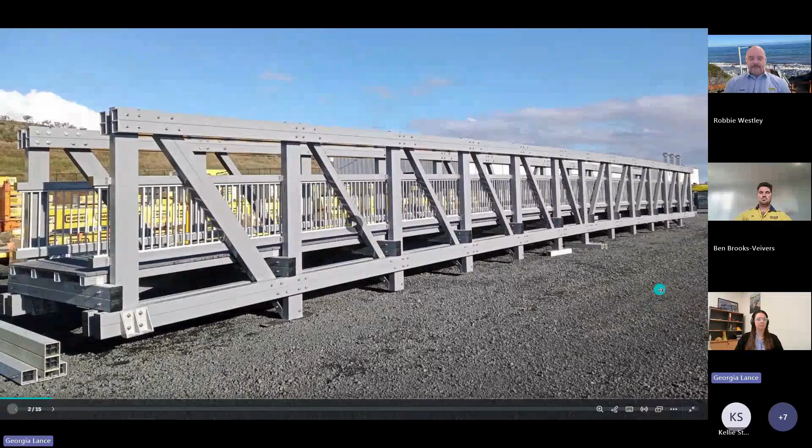Today, we are going to discover how Wagners CFT is designing infrastructure for faster and cheaper construction phases, and how to translate those designs into a better bottom line for your business.

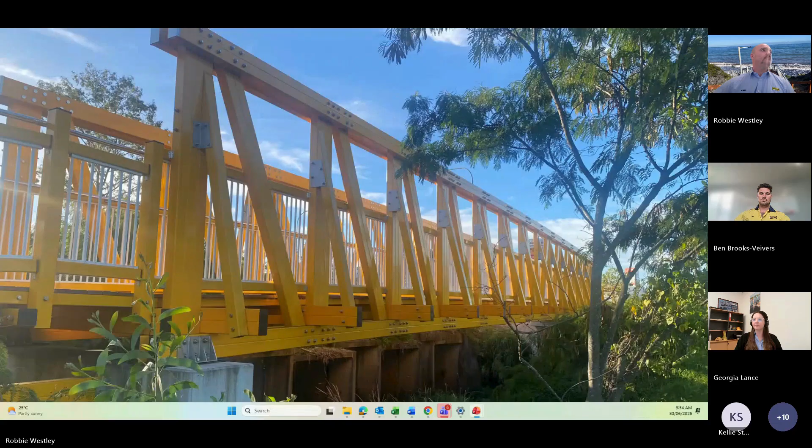Thanks, Georgia, for that. Welcome to the Right Connection Part 2 webinar. Over the past 30 years, Wagners have delivered over 2,000 structures for various applications ranging from boardwalks, bridges, jetties, wharfs, staircases, and many other applications. Over that time, our designs and methods have evolved to increase efficiency in both design and installation.

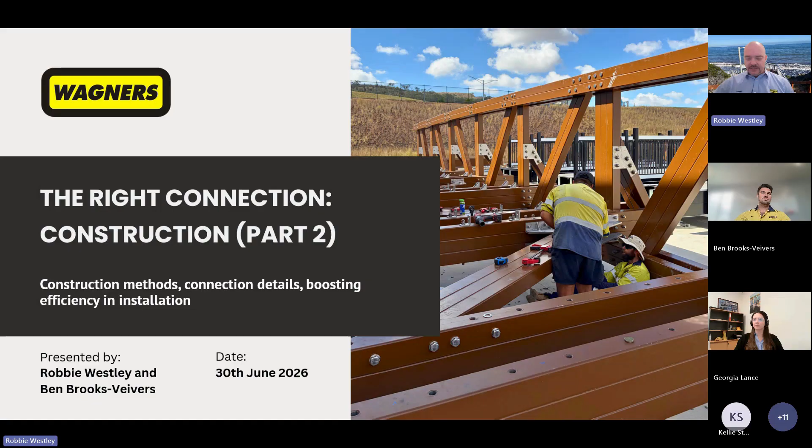In today's webinar, we aim to show several of these evolutions and give some practical examples of how different connections go together and how to more efficiently install them to save time on site and reduce installation costs to the client.

So what we're going to discuss today: installation contractors' feedback, their fears, pain points, and assumptions, and how Wagners have taken this on board and made design changes to increase installation efficiency and save costs. Connection types and working examples of how to construct and estimate anti-crush blocks and crush tubes, time-saving tricks of the trade showing how to most efficiently install different connections, case studies across multiple projects where simplified connections have produced better value installation outcomes, piles and pile connections - circular and square - and also Wagners available resources.

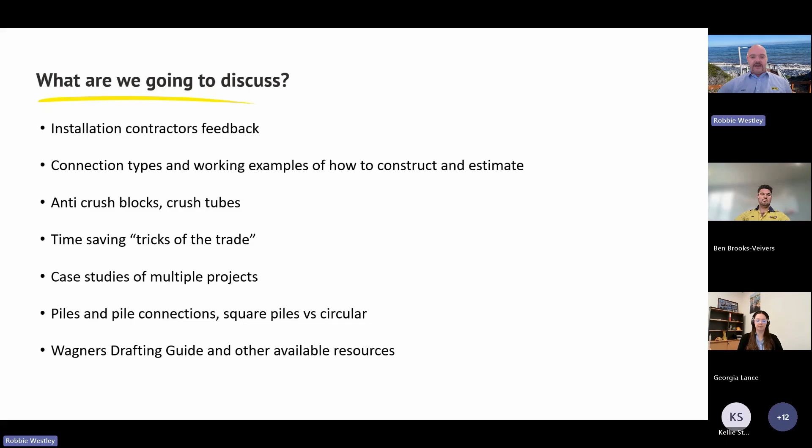Speaking with our contractors over the years, there have been several recurring themes and feedback received in relation to pain points, bottlenecks, and perceived additional time and labour required on site. I'll now hand you over to Ben Brooks-Veivers.

So some of the feedback has been: anti-crush blocks are hard and time-consuming to insert. Too many bolted connections - what other options are there? What if I need to drill a hole non-centered? Additional time spent cutting and drilling. How can we connect to or use open sections? And what prefabrication options are there?

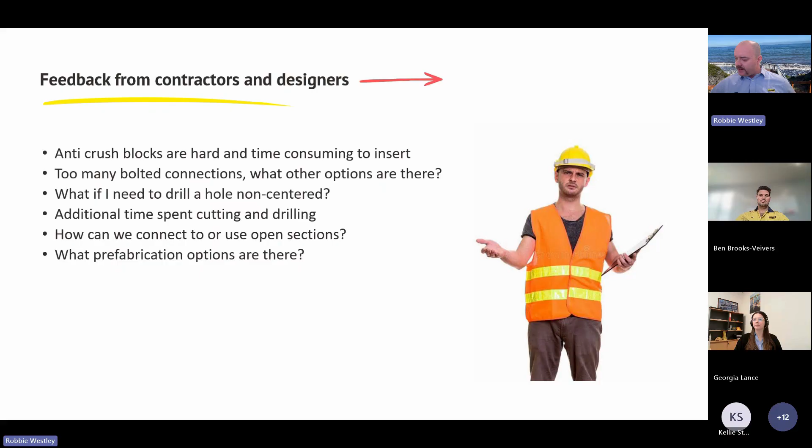I'll now hand you over to Ben Brooks-Veivers to address these feedback points, as well as give you some more in-depth information on connections, crush blocks and tubes, some case studies and comparisons, and general time and cost-saving ideas.

Thanks, Robbie and Georgia, and good morning, everyone else. So crush blocks were once the only option for a bolted connection, and this left little to no room for error on site. Designs had to be perfect, and every step of the installation on site also had to be perfect. There was nothing worse than starting construction and finding a pre-drilled and inserted member missing a crush block in the centre.

A lot of the time, these mistakes would result in the member needing to be replaced or remade on site, which ultimately was difficult as the stock crush block is made to be tight for when we detail a glued connection, meaning inserting on site is very difficult.

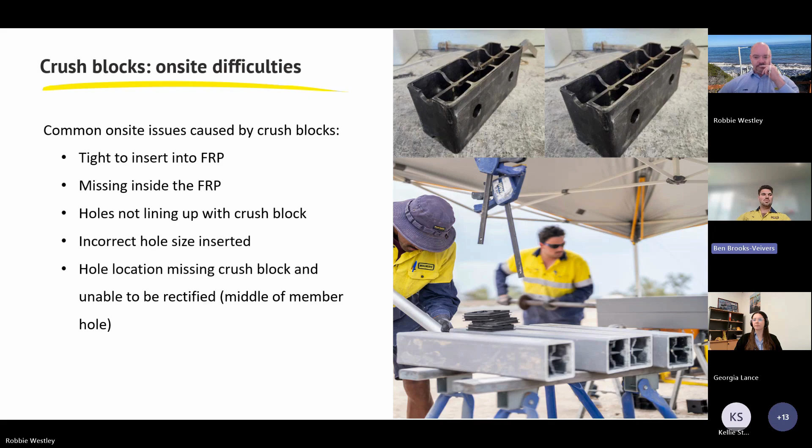Prior to the designs being altered, there were several on-site techniques used to overcome some of the previously mentioned problems. Although sanding down crush blocks is one of the easiest techniques used to make inserting them easier, it is crucial there is still friction there, because if too much is sanded off, the connection capacity of the crush block is reduced. The same occurs when the hole diameter is increased, as the webs in the crush block become damaged. The solutions on the slide all make install smoother, but also all have minor downfalls relating back to the connection capacities.

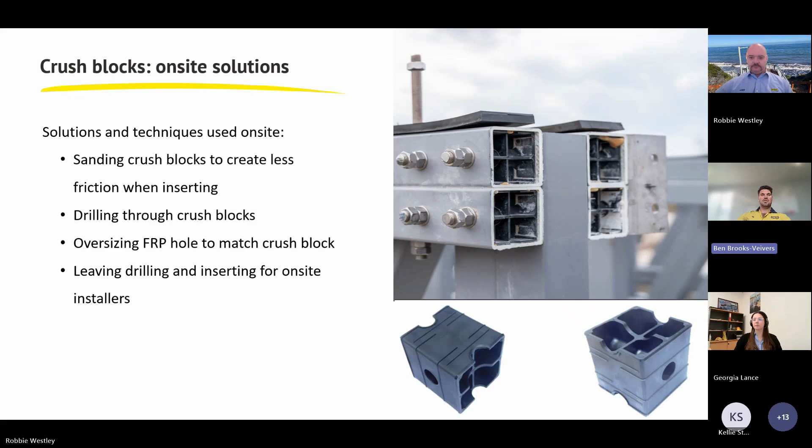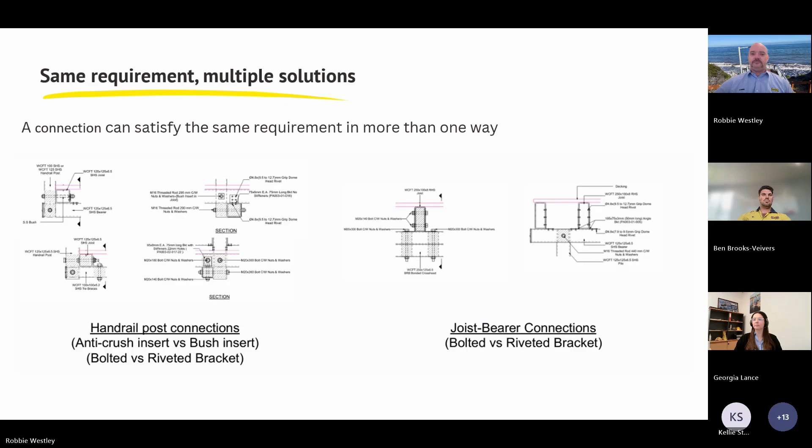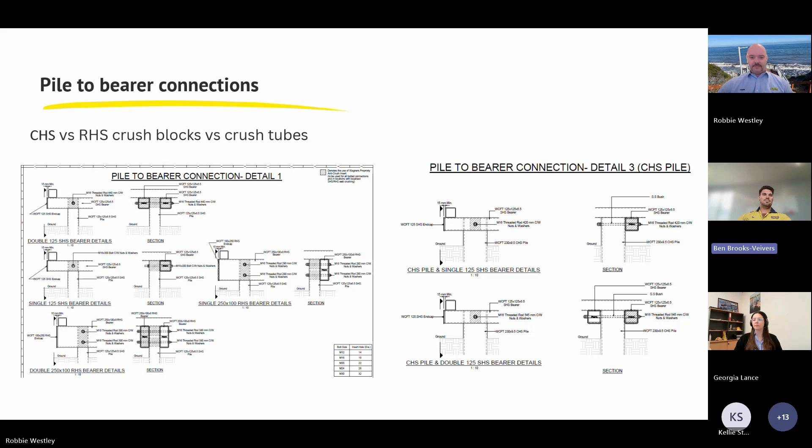Here we'll take a look at our first case study. The Bicentennial project components and design consisted of square posts, crush block bearers, crush block posts, tie brace for handrail post connections, and part crush block and bush tubes for handrail posts.

As you can see, the rough time breakdown to install a bearer to a two-post connection. The process to achieve a finished connection takes a total of 26 minutes, and at $100 per hour for labour and the project's total of 120 bearers, you end up having a rough cost of $5,200.

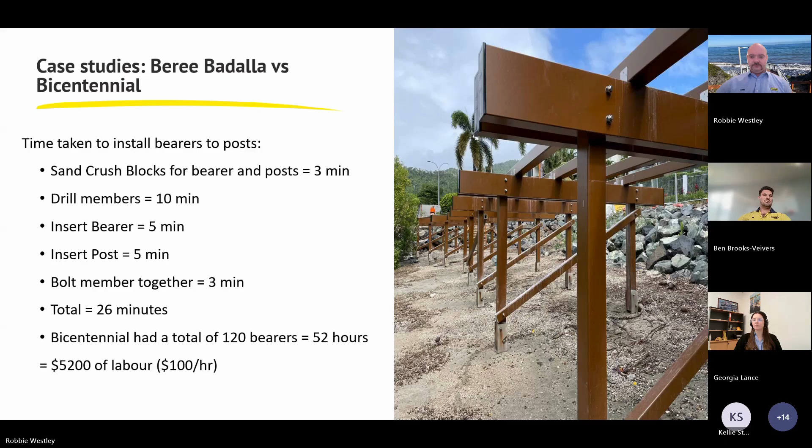The other project components and design consisted of round 178 piles, crush block bearers, bushed piles, riveted diaphragms, and bush joists for handrail posts. As you can see, the rough time breakdown to install a bearer to pile connection there. The process to achieve a finished connection takes a total of 22 minutes, and at the same $100 per hour for labour, with the project's total of 240 bearers, you end up having a rough cost of $8,800.

At twice the quantity of bearers to Bicentennial, you can see the bush connection is far more efficient and cost effective.

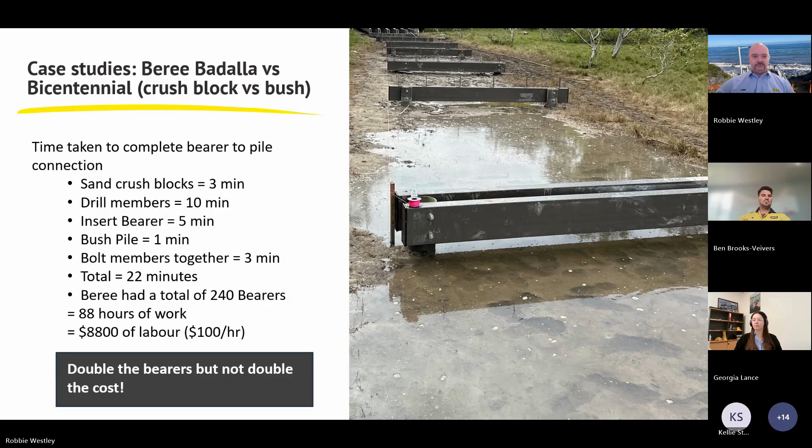Jump into crush tubes now. The increased use of crush tubes across our designs means that an alternative connection solution is now available for most applications, helping to minimize delays and improve flexibility during construction.

As highlighted on the slide, crush tubes offer several advantages that not only simplify installation on site, but also reduce the likelihood of errors, rework, and associated costs. The bush connection's versatility ensures that connection capacity is less susceptible to reduction when real-world conditions deviate from the design intent.

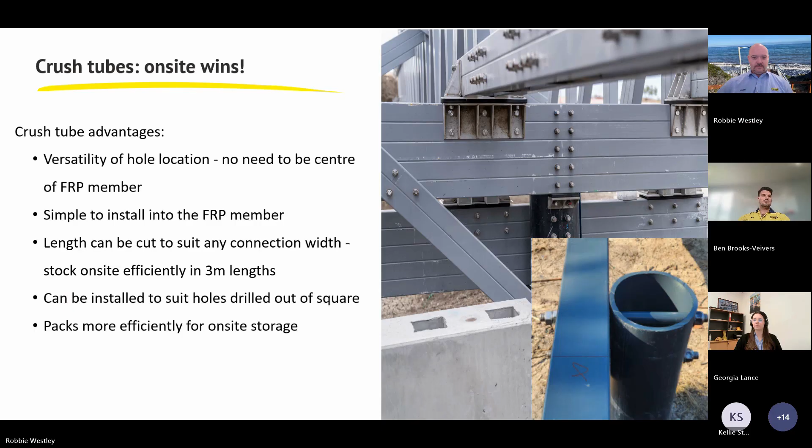Crush tubes are now being used extensively across projects, as reflected by the reduced number of crush blocks appearing in hardware packs and design details.

While crush tubes offer several advantages, there are still some important considerations to be aware of, as highlighted on this slide. When drilling FRP members for bush connections, the hole size must be selected to suit the outside diameter, the OD, of the bush rather than the bolt diameter.

For example, an M16 connection that would typically require an 18mm hole when using a crush block will instead require a 22mm hole to accommodate the bush.

Another critical requirement is ensuring that the overall length of the bush is 1 to 2mm shorter than the overall width of the member. For instance, a 125 by 125 FRP member would require a bush with a maximum length of 123 or 124mm to ensure proper installation and performance.

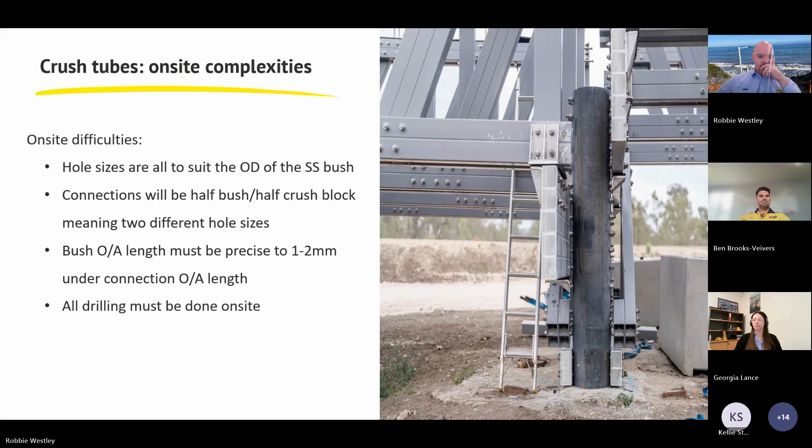Jump into riveted connections. Riveted connections are simple, efficient, and easy to install. While they may not always provide sufficient capacity for heavily loaded structures, they are often the preferred connection solution for when higher load requirements are not a factor.

As shown by the advantages listed on the slide, riveted connections offer several practical benefits. Installation does not require a trade qualification or specialised training, nor is there a need for custom drill jigs or drill shafts. In addition, if installation errors do occur, they are generally easier to rectify and are less likely to cause significant damage to the FRP members, reducing both rework time and repair costs.

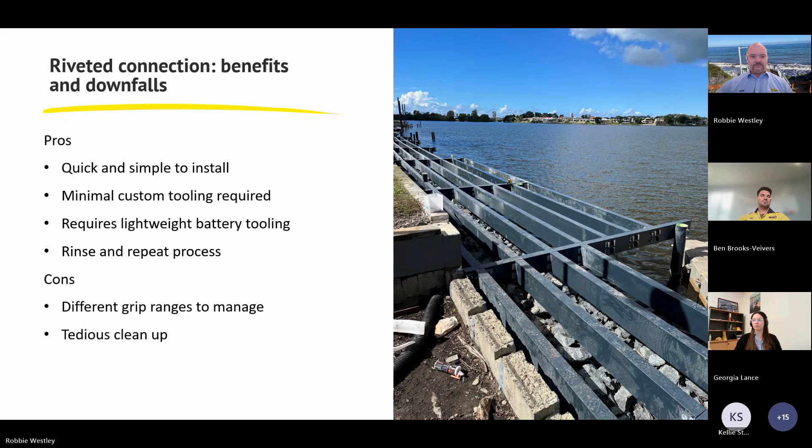We'll take a look back at Beree Badalla in a bit of a hypothetical case. The Beree Badalla joists were designed to use a riveted bracket connection to the bearer. To highlight the benefits of this approach, let's compare the installation process with a hypothetical bolted connection.

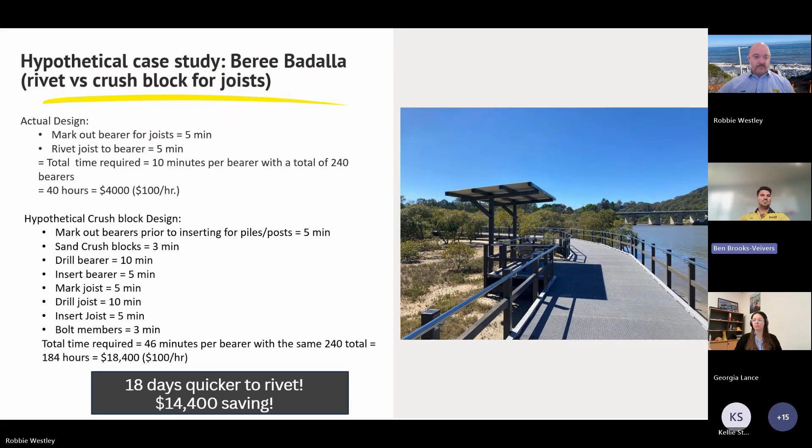The ability to prefabricate and transport complete or partial assembled bridges or boardwalk components is one of the most effective ways to reduce installation time on site. Even when site access limits the transport of large assemblies, there are often alternative prefabrication options that can be developed in collaboration with the production team.

Prefabrication is not limited to assembling and tying a bridge or boardwalk section. It can also involve completing smaller tasks in the factory, such as installing components in advance to reduce the number of rivets that need to be installed on site.

While prefabrication can deliver significant efficiencies, there are situations where the options shown on this slide are not practical. For example, driven piles cannot typically be installed with the level of accuracy required to reliably achieve our 2mm tolerance, meaning some connections must still be completed on site.

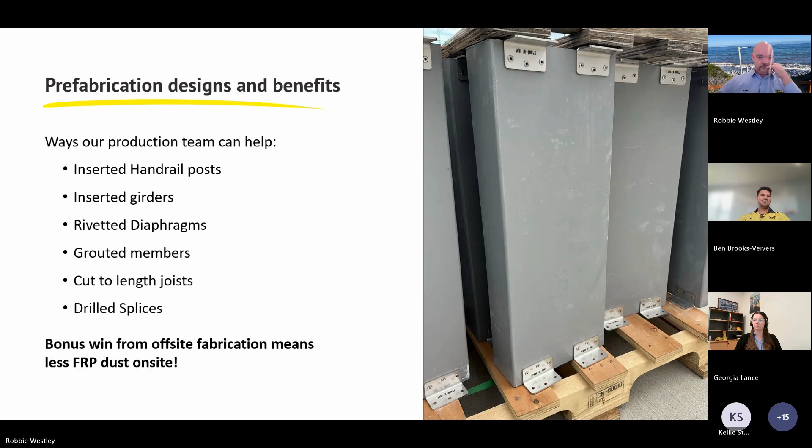Our Phil Hill project components and design consisted of round 178 piles, crush blocked bearers, riveted diaphragms, and bushed handrail joists for handrail post connections. In this example, we will focus on the riveted diaphragm connection and demonstrate how collaboration with the production team can generate significant site efficiencies.

By completing 50% of the required rivets in the brackets in the factory prior to delivery, a substantial amount of on-site labour can be eliminated. Each 250 by 100 diaphragm contains 8 riveted brackets, requiring a total of 48 rivets per member. Across the project, this equates to 21,120 rivets for diaphragms alone.

On the Beree Badalla project, all 21,120 of those rivets were installed on site. This effectively required a worker to spend almost 2 weeks in the same location solely riveting brackets to the diaphragms.

For our Phil Hill project, however, the production team pre-riveted half of the bracket connections before the components arrived on site. As a result, the number of rivets requiring installation during construction was reduced to 10,560, delivering an estimated 6-day reduction in on-site construction time, while also improving productivity and reducing labour demands.

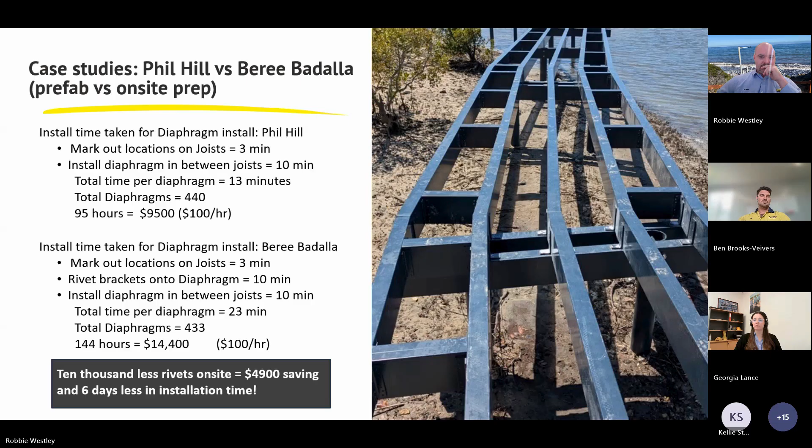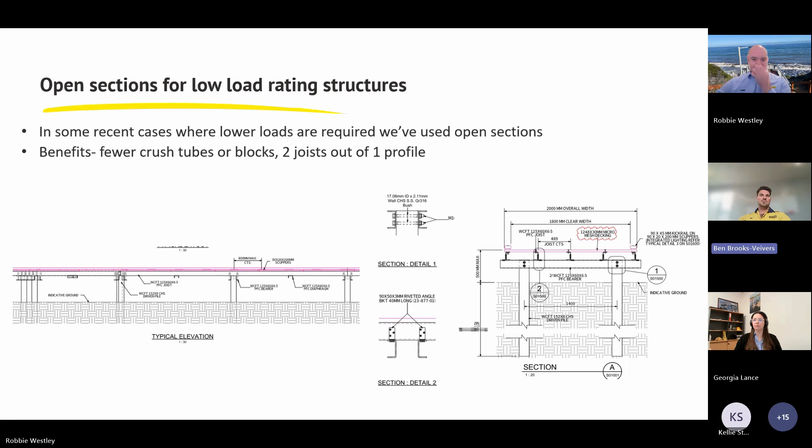Here you'll see our open sections. So we're now starting to see designs for our C-channel members, which are shown by what is on the slide. You'll notice on the details there are no crush blocks shown, just crush tube in the piles.

The Crystalbrook boardwalk is a low-level structure that utilizes C-channel joists and bearer connections with round piles. Where higher load capacities are not required, this type of connection can be a highly effective and efficient solution. As outlined on this slide, C-channel connections offer a range of benefits.

One of the key benefits of these members is their lightweight construction, which helps many projects. Many projects are also carried out in challenging or remote locations, and reducing the weight of the materials can significantly improve site efficiency. Lighter components are easier to handle and install, reducing the physical strain on workers and lowering the risk of manual handling injuries.

They also minimize the reliance on heavy lifting equipment and machinery required, which reduce costs, simplifies logistics, and improves access in difficult site conditions.

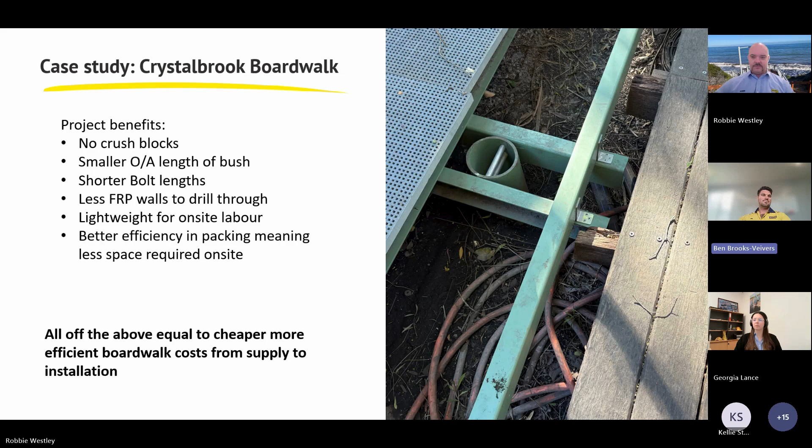Here I'll take a look at round piles versus square piles. So square piles were once the standard pile design used across all of our projects. Today, however, round piles have become the preferred option in almost all applications due to the significant practical advantages they provide during installation. One of the key benefits of the round pile is the increased installation tolerance they offer.

Achieving perfect alignment between two 125 by 125 square piles is particularly hard in hard ground conditions. This was often extremely difficult and time-consuming. When this alignment could not be achieved, the consequences frequently involved additional site work, such as manufacturing and installing custom-shaped packers between the bearer and the pile to maintain a consistent connection interface. By adopting round piles, these alignment challenges are largely eliminated, resulting in a simpler installation process.

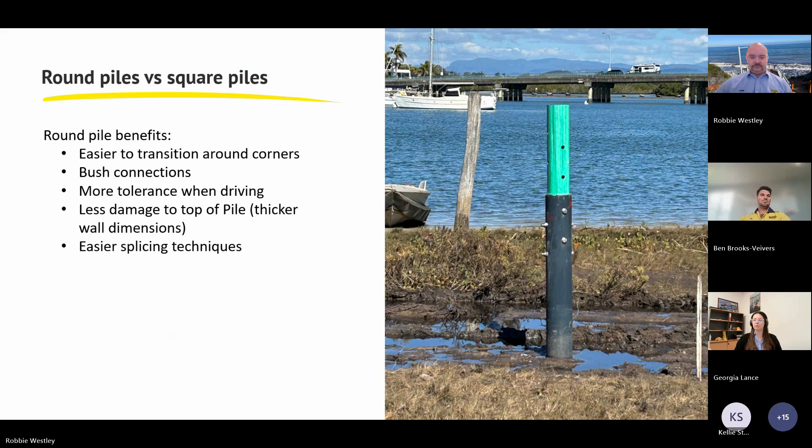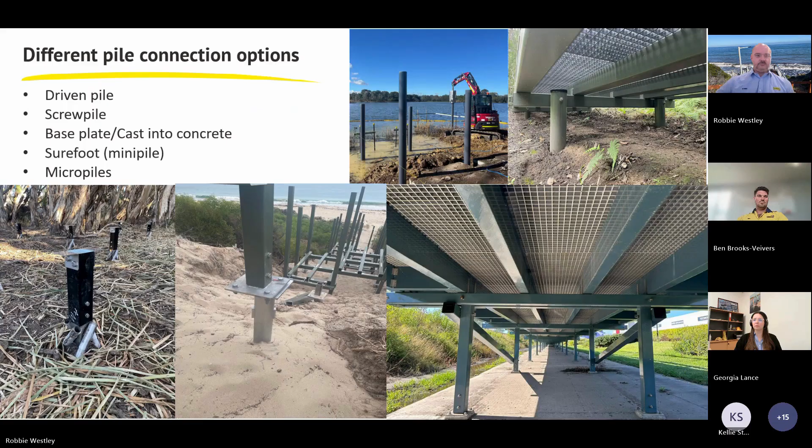Everything I've spoken about today requires the use of tooling, some custom and some available from your local tool shops. If you'd like to know more about these items, you can watch our previous webinar, Tricks of the Trade, which will detail each of these items.

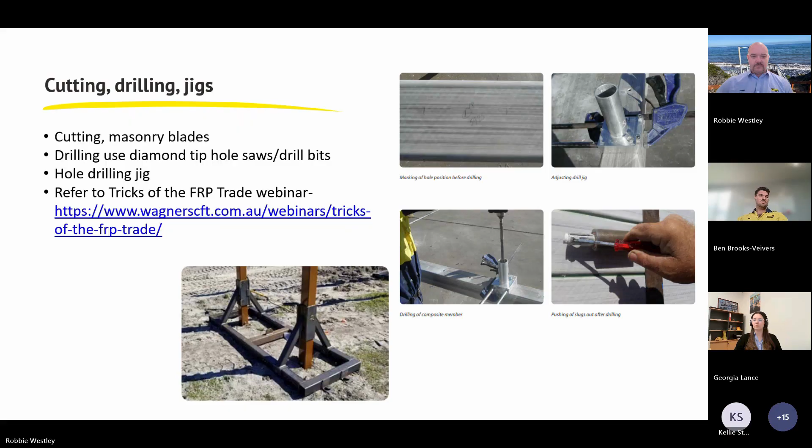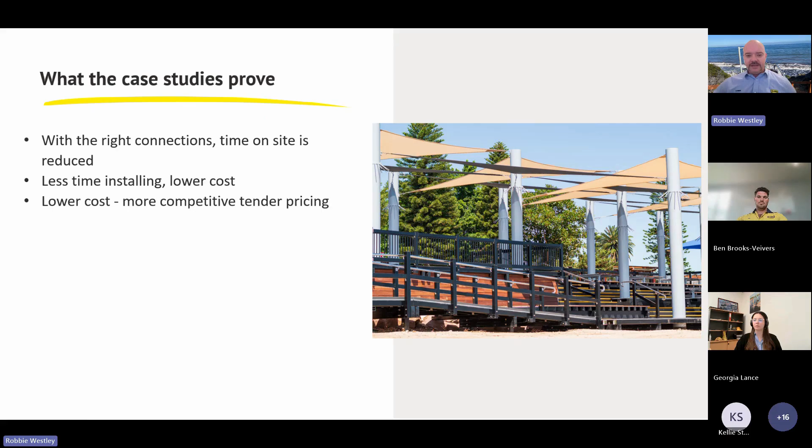Our final takeaways before we move into our Q&A. What we think we've given you today is a better understanding of how we build up costs to greater assist contractors and estimators in pricing up work.

We've demonstrated that all connection types have their place. It's not one solution for all problems, and there are a lot of innovative ways to do that. There is a measurable cost and time saving through innovative design, and the adaptability of different types of connections will always have ongoing cost saving effects.

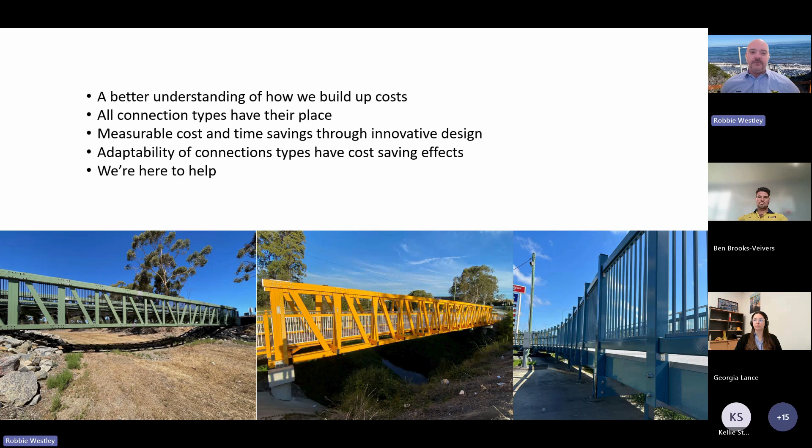As long as you make the selection early in the piece so it can be planned for. And last but not least, we're here to help. Wagners have a large number of highly skilled engineers, draftees, estimators, and project managers across the board. So if you're looking at a project and pricing it up, and you want some assistance with that, just reach out to us. We will get the right person onto the job to assist you and allow you to put your most competitive tender submission in.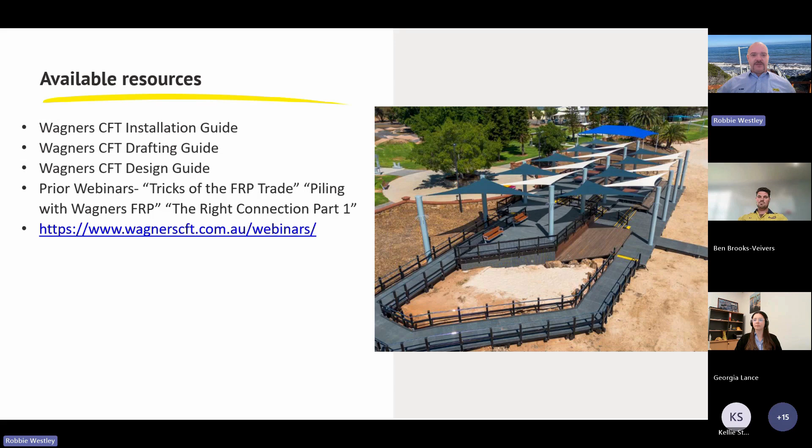In regards to available resources, I'd highly suggest going to our website where we have the Wagners installation guide, a drafting guide, and a design guide, as well as a number of other useful resources. Prior webinars, tricks of the trade, piling with Wagners, and the right connections are all available at our website in the webinars section.

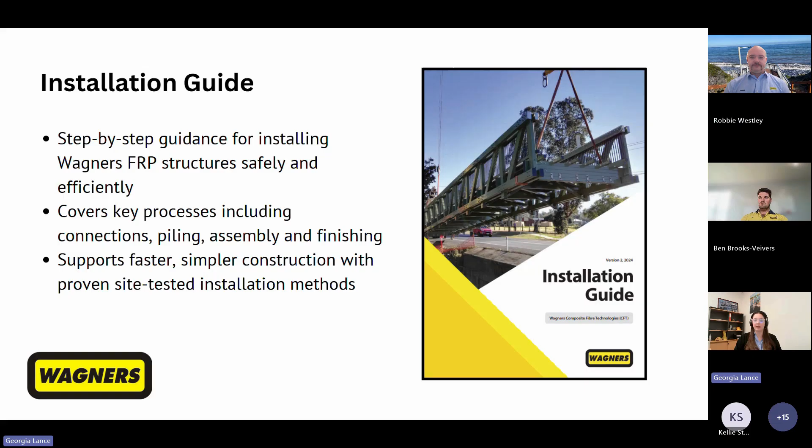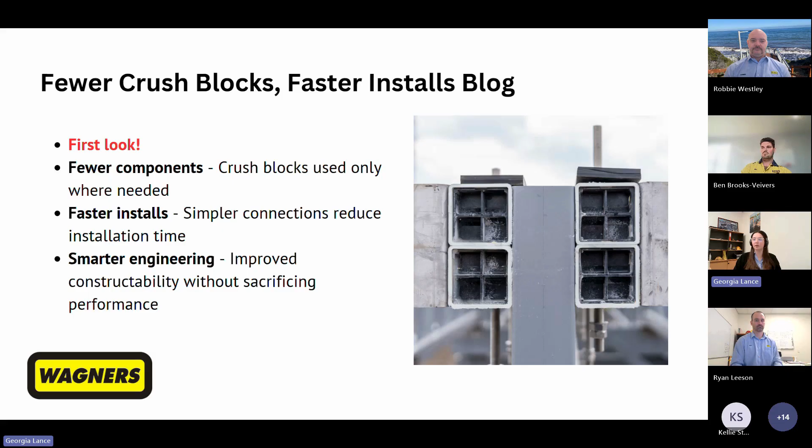I'd now like to welcome Wagners CFT General Manager Ryan Leeson, who will be facilitating the Q&A session of the webinar today. Let's have a look at some of those questions, Ryan. Thank you very much, Georgia, and well done, Benny and Robbie. Maybe before we pile into a couple of the questions, just a first comment, Ben, from you. What's the main piece of feedback you'd give to designers before they do release a set of drawings, be it as IFC or to a construction crew to get underway and build? What's the number one thing we pick up on that you'd love to see addressed at a design stage?

The simplicity of constructability is definitely the number one thing we need to focus on in design. How we do it on site in those harsh conditions and environments tends to be a larger factor, and design teams can work with us to make those steps easier.